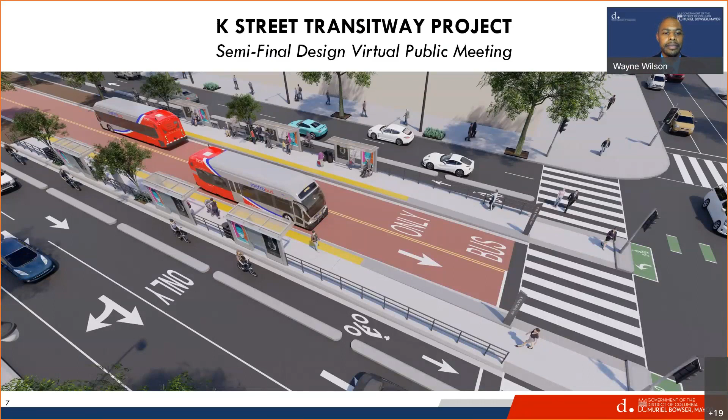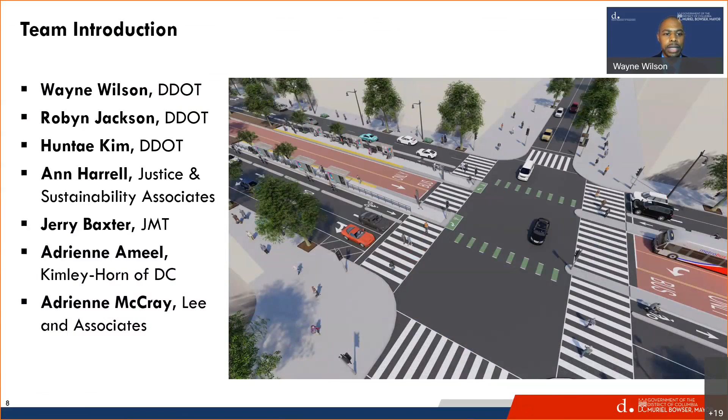This evening, we'll be presenting the 65% design for the project. Ddot and the consultant teams are eager to hear your feedback and the efforts that have been made by the department and the team to progress the project forward. Next slide. With us today, we have Robyn Jackson, the Deputy Program Manager for Wards 1 and 2, Huntae Kim, the Program Manager for Ward 1 and 2, Ann Harrell from Justice & Sustainability Associates, Jerry Baxter from JMT, Adrienne Ameel from Kimley-Horn of DC, and Adrienne McCray from Lee and Associates. Now I hand it over to Jerry.

Thank you, Wayne. Hello, everyone. Thank you for joining us. I'm excited to be working with Ddot on this project and looking forward to talking with you this evening. We will provide a project overview and present details on key project elements. The primary objectives of the project are transit improvements, bicycle facilities, curbside management, which is how the curbside space is utilized, and streetscape enhancements to the corridor. We also provide an overview of next steps and what you can expect to happen relative to the project.

Finally, we'll have a question and answer period where you'll be able to provide comments. Public involvement is a key part of any Ddot project, and I want to emphasize that the project team is eager to hear your input on the project.

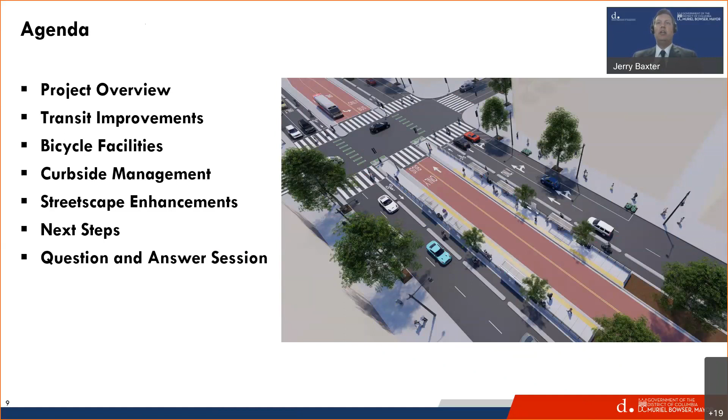Before we get into the what about the project, I'd like to give a little background on the why for the project. This project is in line with MOVE DC, which is the District of Columbia's long-range transportation plan. This plan establishes goals, policies, strategies, and metrics for DDOT to invest in transportation projects and programs that address the needs of Washingtonians.

Across all 8 wards. I've noted on the screen the 7 goals of the MOVE DC program, and the K Street Transitway is a project that addresses every one of these goals. The first goal is safety. Safety is a primary objective in all DDOT's projects, consistent with Mayor Bowser's Vision Zero initiative.

Safety improvements are being incorporated into the project, including median refuges and shorter pedestrian crossings, all-day left turn restrictions and reductions in pedestrian vehicle conflicts, separating bus and vehicular traffic, and providing cycle tracks, which are separated from motor traffic and the sidewalk. Mobility will be enhanced through increased system reliability, improved accessibility, and better transit system performance.

Management and operations is ensuring a good state of repair for the significant investment DDOT is making in the project. We are also designing with maintenance considerations in mind and coordinating with local stakeholders. The project is being designed to be accessible, safe, and welcoming. Our project team is working to create a sense of place to create enjoyable spaces along the corridor.

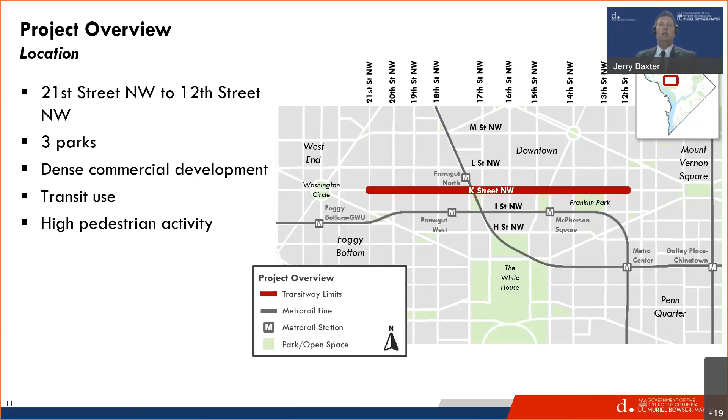The Transitway will span 11 blocks, and while no 2 blocks are the exact same, the typical section shown on the screen provides the general layout that will be carried through the project. The project limits are from building face to building face, but delivery of the transit lanes is the primary goal of the project, so the majority of the work is from curb to curb.

First, the existing service lanes on K Street will be removed. This configuration is outdated and inefficient, which leads to congestion along the corridor. There is a high potential for pedestrian and vehicle conflicts in this configuration, and it will be reduced. The proposed layout was developed considering the district goals, the local area, and the site conditions, including available right-of-way.

As shown on the screen, in the center of the roadway will be 2 separated transit lanes, one going in each direction for buses. Adjacent to these lanes will be medians. The bus stops and platforms will be located in these medians. Next to these medians will be one-way cycle tracks, which will be separated from both transit lanes and the general travel lanes. Between the cycle tracks and the travel lanes will be a narrow median. On the outside will be 2 travel lanes in each direction.

In some blocks, where there is sufficient right-of-way, loading, pickup drop-off, and parking areas will be provided. These locations are between 21st Street and 17th Street and at the eastern end of the corridor. We'll provide a block-by-block breakdown later in the presentation.

The roadway widths do become constrained at the 3 parks along the corridor. At these locations, the sizes of the medians adjacent to the transit lanes will be reduced as shown on the screen. However, the number and types of different travel lanes through the corridor will be maintained.

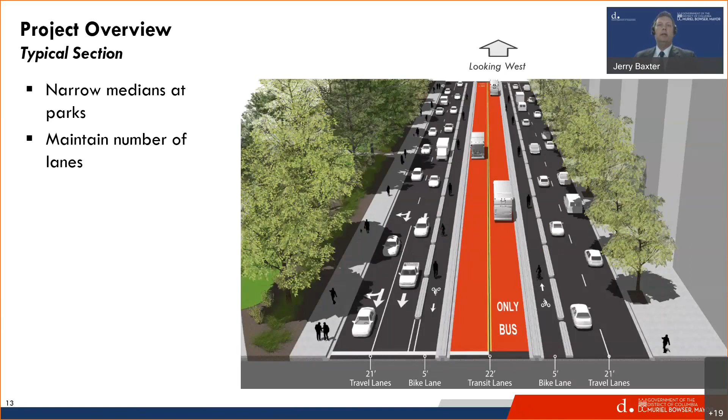This project has been in the works since before 2009. Any project of this magnitude will go through an environmental assessment according to federal standards, which was completed in 2009. Mayor Bowser identified this project as a mayor's initiative in 2018. Since this time, this project has been a major focus for DDOT. Preliminary design was completed 2 years ago, and the team began final design last year.

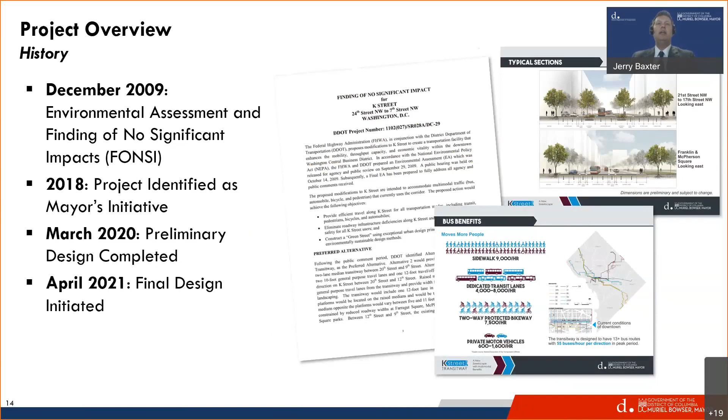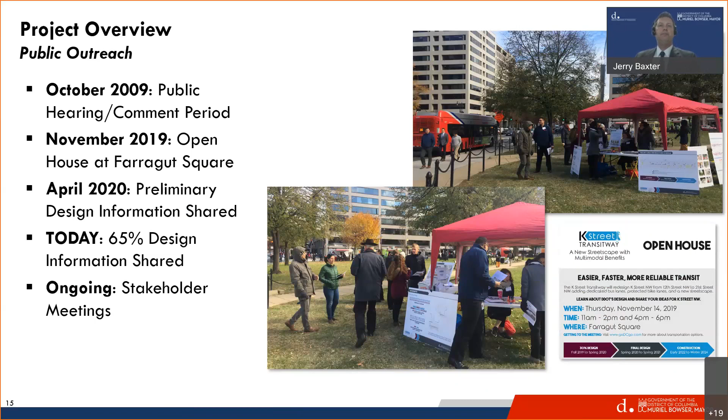As you may know, or would probably guess, there are an abundance of utilities underground in this corridor. Utility coordination is a key project element, and this is an extensive and ongoing effort.

The transitway will include 4 new stops per direction, for a total of 8 platforms. Each platform is paired with one on the other side of the street. The project was developed based on providing connections with the transit network. This is part of an ongoing coordination effort between DDOT and WMATA, and the current plan is to incorporate at least 13 different routes on the transitway. The transitway will serve up to 55 buses per hour per direction during peak periods.

Concurrent with the K Street project, other projects are in various stages for the north-south streets, either in the 2022 budget or proposed in the mayor's 2023 budget. This project is looking at the entire network with their improvements.

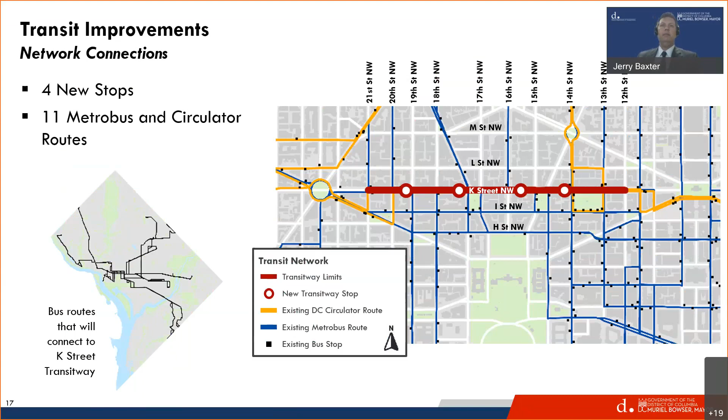The platform design is a major focus of the project, considering accessibility, operations, and a sense of place. Platforms will be 11 feet wide and include amenities such as shelters, leaning rails, trash and recycling receptacles, real-time travel information, and landscaping. The platforms will be designed to be compliant with the Americans with Disabilities Act, or ADA.

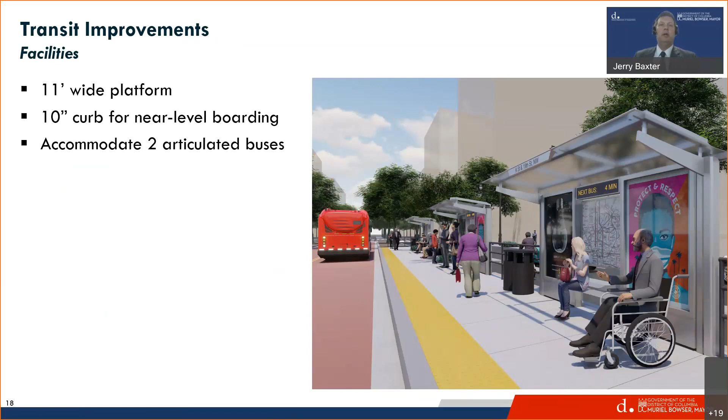The platforms will be elevated 10 inches from the roadway surface, which is higher than the standard curb height of 7 inches. This will allow for near-level boarding. The length of the platform has been designed to accommodate 2 articulated buses at the same time. In addition, landscape and design features are being developed to create a sense of place at the shelter. The goal is to create prominent, welcoming platforms. Access to the platforms will be from the crosswalk, somewhat similar to today, but with some improvements.

The transit lanes will be controlled by bus signals, similar to other locations in the district. The general traffic and bicyclists will follow traditional traffic signals. Based on the proposed typical section and elimination of left turn movements, the corridor will be able to operate very effectively and efficiently. The buses, bicycles, and general vehicles on K Street will be able to go at the same time, with few exceptions. At 19th Street and 13th Street, the buses will have a separate phase to exit the transitway. And at 12th Street, bicycle signals will be provided to separate bicycle phases from the general purpose movement.

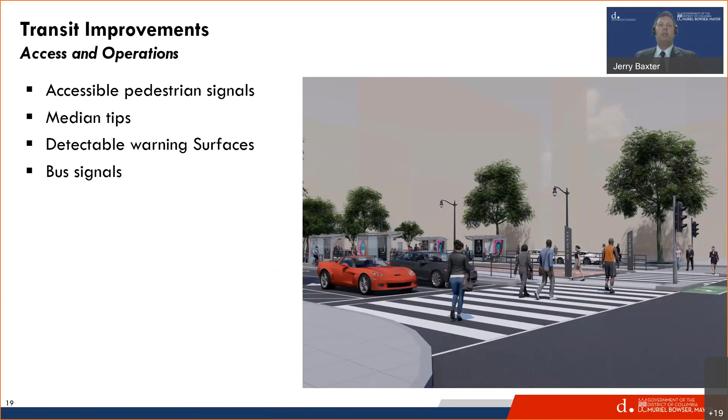In addition to the signal phasing changes, there will be benefits to separating the buses from the travel lanes and general traffic. The issues created by mixing buses and vehicles—parked cars blocking a bus, or a stopped bus blocking a right-turning car, for example—will be eliminated.

The improvements being implemented by this project will reduce travel time for all users while adding access for another mode through the cycle tracks provided along the corridor. I will now hand it over to Adrienne to talk more about bicycles, pedestrians, and other aspects of the project.

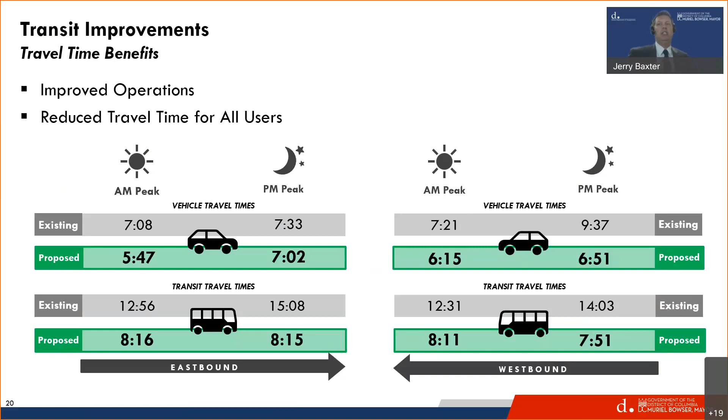Thank you, Jerry. As Jerry just mentioned, although this project is mainly a transit project, it includes safety improvements for both pedestrians and bicyclists. There will be wide, high visibility crosswalks included at all intersections, which will improve safety for pedestrians.

The new bike infrastructure will include two one-way cycle tracks, one on each side of the center-running transitway, protected by a cement barrier approximately 2 feet wide, which is a significant improvement for bicycles along K Street. The cycle track will result in significant safety and access improvements for bike travel across downtown. The only intersection where bikes will have to cross the general purpose vehicle lanes is at 12th Street. In order to ensure bikes can safely cross vehicle lanes, a bike signal will be provided at this location.

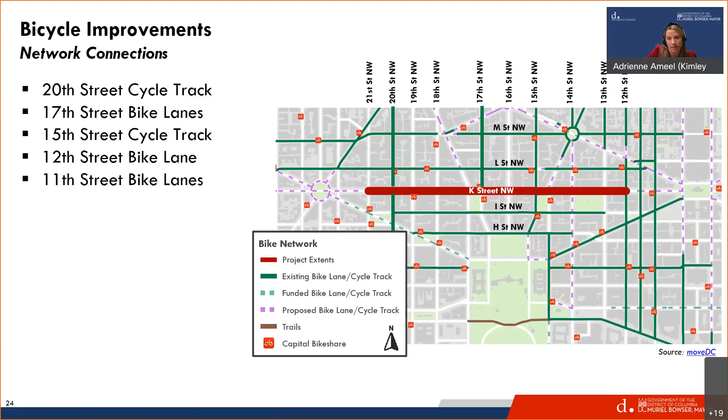The curbside uses currently shown on these graphics are based on multiple meetings and feedback we received from the public, the Golden Triangle Business Improvement District, and the Downtown Business Improvement District. Development along K Street is always changing in this post-COVID environment, so these curbside uses are not final and are subject to change. Please provide feedback during the meeting if you have other comments or recommendations.

Also, as part of a separate project, some minor curbside changes will occur on the side streets, adding pickup and drop off and commercial loading for buildings whose curbside uses were removed along K Street. The trees and landscaping shown on these maps are dependent on utility conflicts that the project team is currently working through, so the trees may decrease in the future due to utility conflicts.

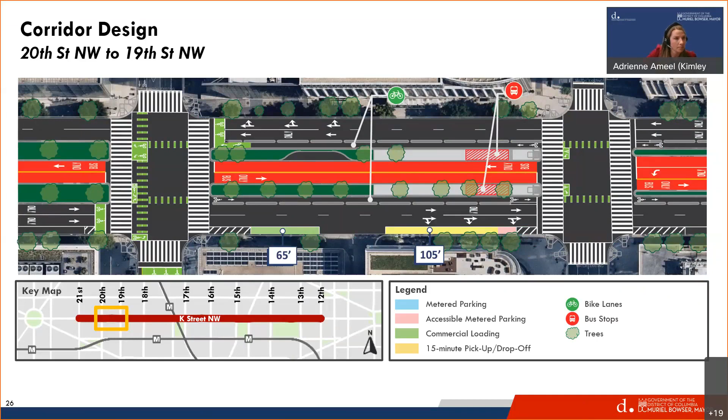Now between 18th Street and Connecticut Avenue, this block has the second set of bus stops, located near Connecticut Avenue. Similar to the first set, pedestrians will access this bus stop using the center running medians. Curbside uses continue on the south side with metered parking, accessible metered parking, pickup and drop off, and commercial loading.

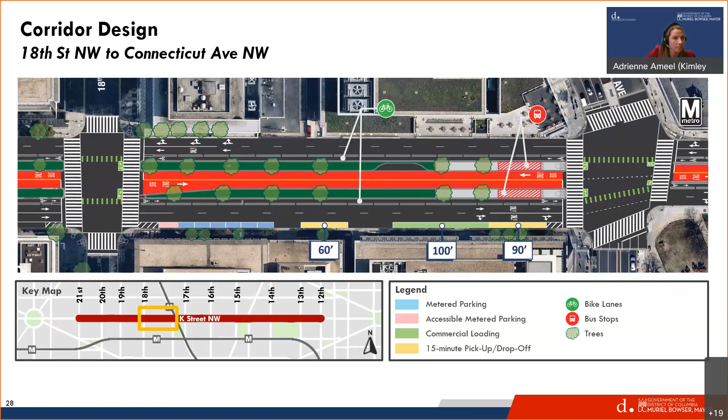15th Street to Vermont, this is a fairly short block. There are no curbside uses on this block due to the constrained right-of-way with McPherson Square to the south. The medians separating the transitway and cycle track are narrow, approximately 2 feet in width.

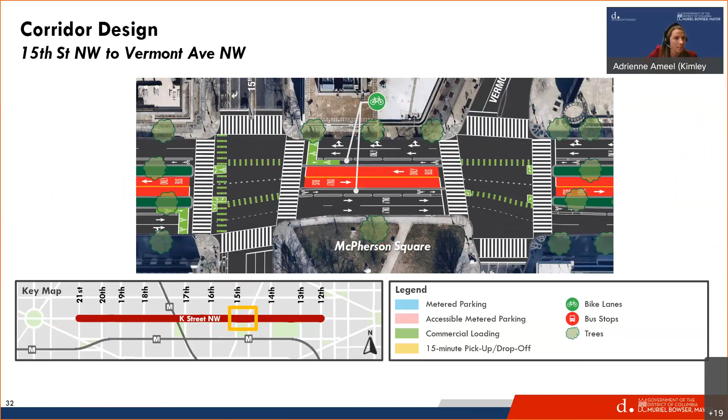Vermont Avenue to 14th Street is the location of the fourth and final set of bus stops. Similar to the other bus stops, pedestrians will access the bus stop with the center running protected medians. There are curbside uses on the south curb at the eastern end, including commercial loading, pickup and drop off, and accessible metered parking.

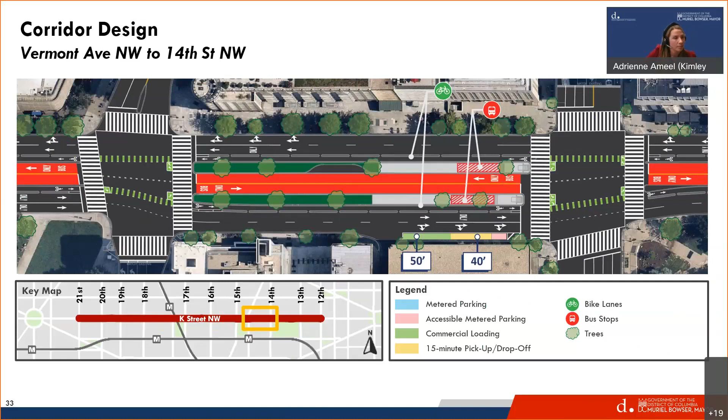14th to 13th Street: there are no curbside uses on this block, with a narrow center median of 2 feet due to Franklin Park on the south side. Something unique on this block is that one of the eastbound general purpose vehicle lanes drops at 13th Street, so only one lane of eastbound traffic will be able to go through the intersection.

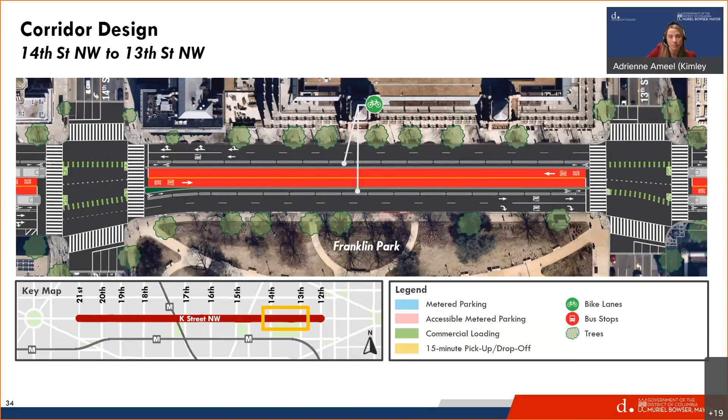From 12th Street to 11th Street, this is a transitional block where buses will transition from the transitway to general purpose lanes in the eastbound direction, and in the westbound direction, buses will transition to the transitway using the center lane. There are no curbside uses on this block and no center medians. The bike lane striping connects to both the northbound and southbound bike lanes located at 11th Street.

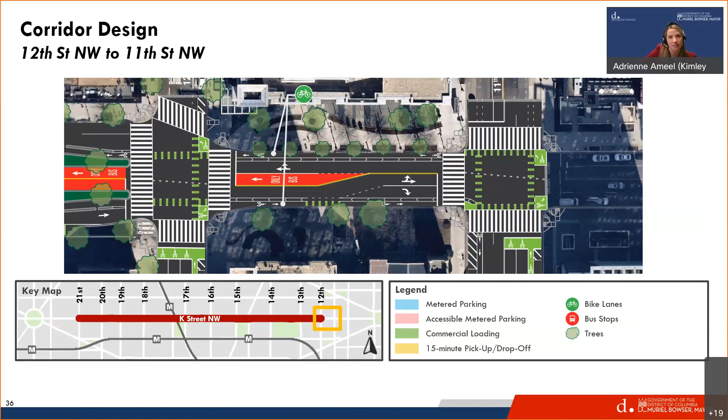In addition to the roadway and median improvements, the project is also going to be doing some sidewalk streetscape upgrades. The goal is to enhance the visual quality and experience for users in the corridor. We're going to do that by looking at material consistency through the hardscape, softscape, as well as the site furnishing.

We also want this to be a green street by enhancing the existing canopy and providing new robust trees. We've been looking at accessibility concerns, and we're going to be improving some of the sidewalk cross slopes as well as the ADA ramps throughout the corridor. We're also supporting opportunities for outdoor amenity, which in turn will activate the public realm.

As we continue, we'll reinforce the sidewalk zone that currently exists by improving consistency. We're starting with the tree pit zone, from the curb to the sidewalk, where we'll preserve existing trees and provide new street trees. We'll be placing new Washington Globe Twin 20 light fixtures in the corridor, and providing other furnishing as well. We're showing some DDOT standard furnishing, but we're working with BIDs to integrate their furnishing standards in key areas, and also identifying opportunities for public art to be incorporated.

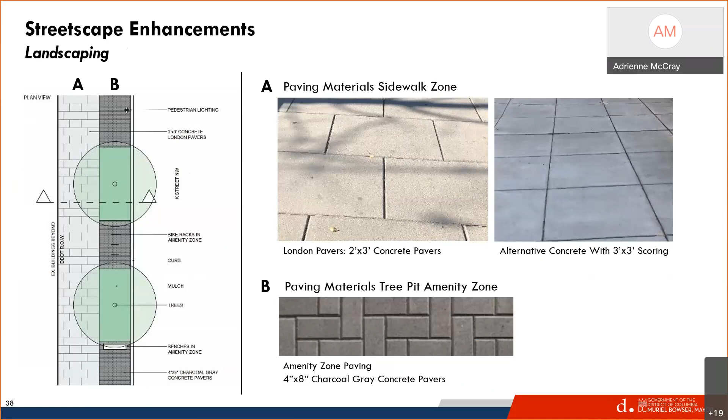The existing street trees along the sidewalk are part of the amenity of the street and will be maintained as much as possible. We've been evaluating the condition of the trees to determine if enhancements are needed to improve health, and any new trees planted along the sidewalks will match the character of the existing trees. This will help reinforce our goal to provide a continuous canopy that offers changing visual interest through different times of the year.

The existing medians throughout the corridor are going to be removed, so we'll be planting new trees in the medians. We'll plant as much as possible, noting we've got a lot of utilities we have to work around.

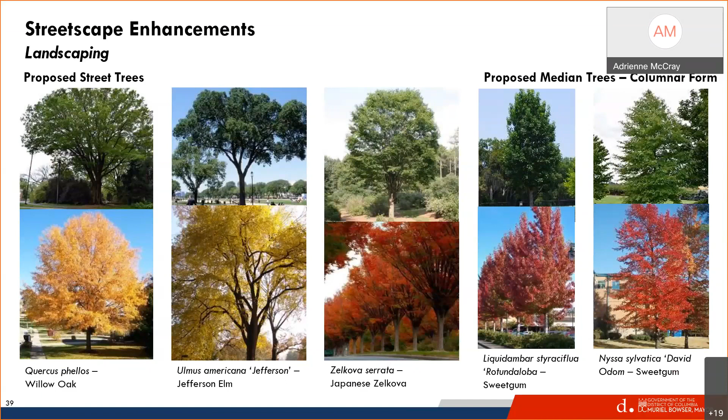In addition to the trees, the medians will be planted with hardy shrubs and ground covers. We've got two planting strategies for the medians: one is at-grade planting, standard, where the soil level is at the height of the curb. The second strategy is low-impact development using a bioretention planter, where the soil level is slightly recessed, allowing runoff from the roadways to be captured and filtered through the soil medium. This will help our project meet the citywide green infrastructure and stormwater management goals.

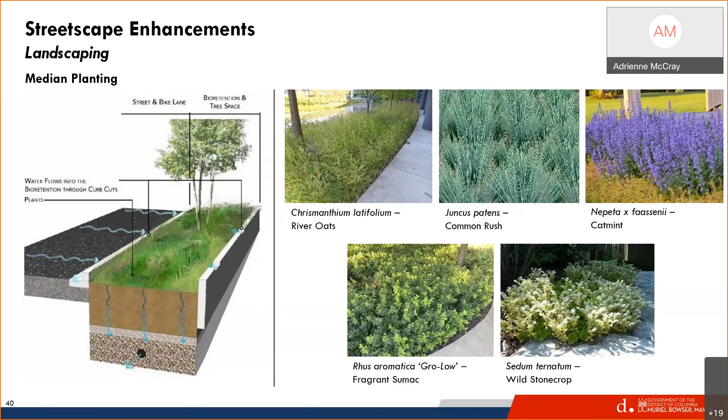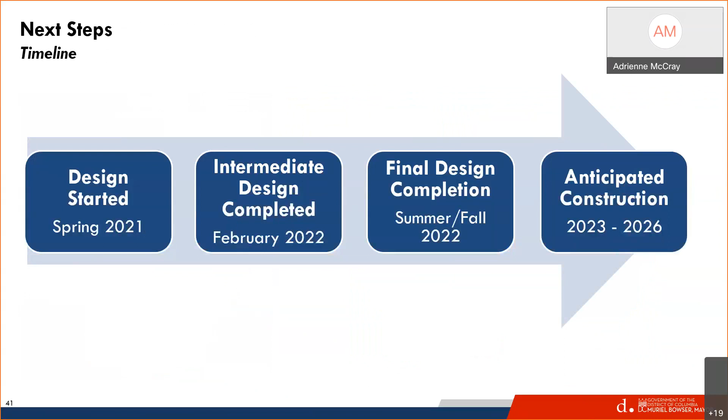Thank you, Adrienne. So the image on the screen provides the next steps and project timeline for the project. We started our design last year, and our project completed the intermediate design in February. We are now progressing towards final design, which is scheduled to be completed late this summer or early this fall. From that, a construction contract will be advertised, with construction estimated from 2023 to 2026. The estimated construction duration is 30 to 36 months, and the final design phase will include development of many of the details related to the construction of the project.

It is also important to note an additional public meeting will be held concurrent with the final design. I will now hand it back to Ann, who will walk us through the Q&A portion.

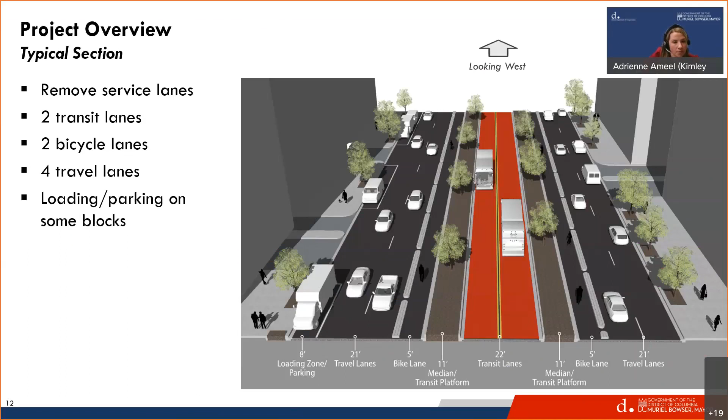Okay, the next comment and question.

The only concern I have is that personally, I'd be pretty nervous to use those bike lanes since they're placed right in the middle of traffic. The similar ones on Pennsylvania Avenue are really uncomfortable, and turn boxes just feel extremely dangerous instead of turning with traffic like you would in a roundabout or traffic light. Has a consideration been made to move the cycle tracks behind the trees along the sidewalk? And thank you.

I believe we may have already answered this question of why it's in the center, but I don't know, Wayne, if you want to add any more to that response.

Yes, so internally at DDOT we had this debate as well, because we do understand the natural tendency is to be curb-running for our bicyclists. So we evaluated, just because of the high turn volumes from garages and vehicles, and the ability of having an 11-foot median between the bus and an additional buffer between the cars, we selected the center.

It is something that was a long debate, and we did a stakeholder meeting, we did public meetings about it, and we did reach out to WABA because we had the same concerns about center running versus curb running. And as I stated earlier, it was because of the high turn volumes as well as the changing right of way, where the bike will actually have to do some certain amount of maneuvers and shifts and push it closer to traffic. We just felt that the center running was the best option, the safest option, even though it's not prevalent in the city. It is something different. So we do understand the concern, but that's the reason why we went with center running.

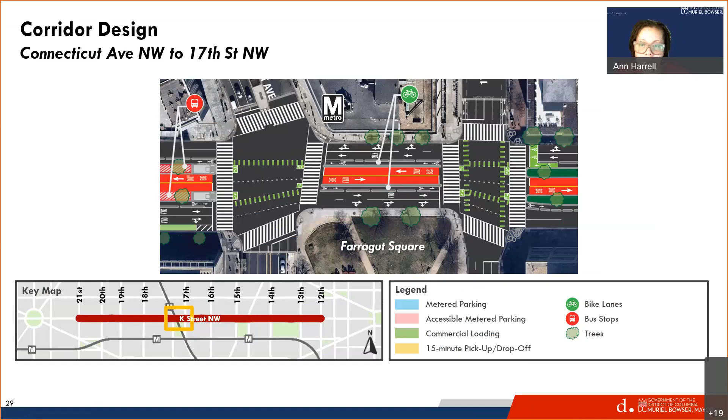The remaining questions ask how one positions themselves. I think you might have answered this. It's difficult to understand how to turn right when using the inside bike lane. Hopefully what Adrienne just described has answered your question, this is for Bill Gallagher. If not, we'll come back to your question. Can we show the two-stage diagram really quick, that may answer it?

Yeah, we can go back to this and I'll point this out again. As you can see, this is the two-stage turn box, which is a little bit confusing. The westbound cyclists would go westbound and pause at that two-stage turn box until the light turns green in the southbound direction. You have to pause and wait for that light to turn green, at the same time vehicles would be able to go southbound here on 17th Street.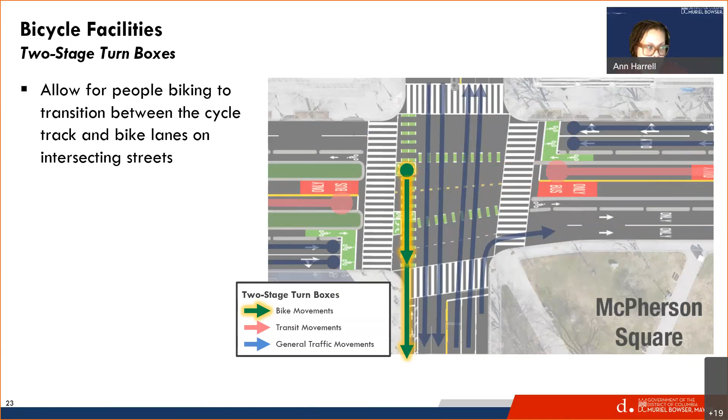So hopefully that clarifies. Mr. Gallagher, if you have a follow-up question, please post it in the Q&A and we'll respond. We're going to pivot for a moment and talk about bioretention environmental.

Perhaps Adrian McCray would be the person. The first question is, will there be any rainwater bioswales included in the design? You're on mute. Sorry about that. We are including some in some of the median areas.

Another question is about the visual impact of plants and trees being studied to make sure they are not blocking all modes' views when turning. Yeah, so the tree placement as we're coming to the intersections will be 40 feet away from those intersections to allow for views of the traffic coming into that intersection. As far as ground cover, as we're getting into the intersection, we're planning to keep our plant material at a 2 foot maximum in those areas.

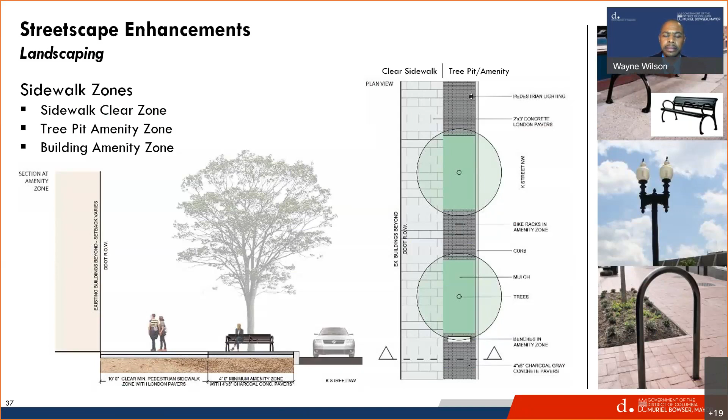Wayne, thank you. We're going to pivot momentarily back to the subject of bicycles and related concerns. I find turn boxes both confusing and scary on multi-lane streets. I'm sorry, this is just a comment, not a question, but I echo the comments of others that they need protection. A question: what will be the buffer spacing between the personal car lanes and the bike lanes? What will be the physical separation elements of the buffer?

So we're hearing the continued concerns regarding the buffer. Yeah, we'll definitely take a look at it. Right now it's about a 2-foot cement buffer. We can add bollards, I see that as a comment. I'm not sure if this is the same comment on the design, but that's some great feedback.

Another question, possibly for you Adrian, is how many bikers can fit in a turn box at a time? So the 2-stage turn boxes vary by intersection, depending on how much space we had. So it just varies from 1 to 2. It's not many bikers that can fit in those turn boxes.

Another bicycling question is, will there be any bollards to protect cyclists in the cycle track from drivers? Additionally, this could help prevent drivers from impeding the bike lane when making U-turns, dropping people off, etc., like can happen on 15th Street. Yes, we can definitely look into that. Right now we're not showing the bollards, as you can see from the rendering on the screen, but that's something we can add and we'll take into account.

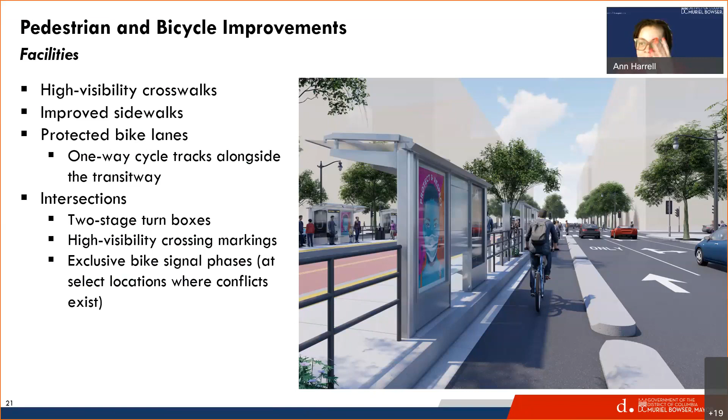Thank you so much. First of all, I want to thank all the project team members for your great work here. I know this is a difficult task, and you seem to have done a very good job getting us to where we are today. I hope we're able to move up the construction timeline from where it is now.

The only question I have is if folks could talk a bit more about the terminus at 21st Street. I live in Foggy Bottom, and from what I understand, in its interaction with 22nd Street onto the ramp, either up to Washington Circle or down to the underpass under Washington Circle, it'd be helpful to understand a bit more of how that interaction is going to work, given that the project doesn't necessarily extend all the way to Washington Circle. Thank you.

I guess, Nick, can you maybe share slide 25? Perfect. And I guess, maybe I'm not capturing the question, so the idea is, as you can see, the transit lanes will end. The buses will either turn, they will have their own separate signal phase to go, so if they're coming out and turning left, or straight forward and right, and then for general traffic, it will essentially return to its existing condition to the west of the intersection. Not sure if that answers it, or if there was something else.

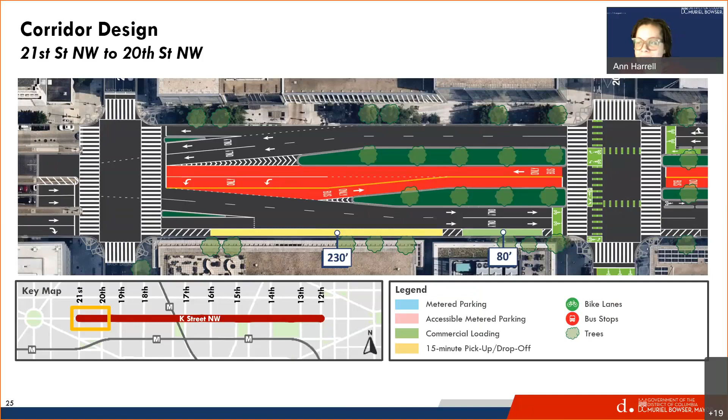If there's no follow-up, I'd like to have Garrett Hennigan unmuted to ask his question or make a comment. Good evening, thanks so much for the opportunity and for the presentation. Garrett Hennigan, I'm with the Washington Area Bicyclist Association, and glad to see all this coming together. Three quick comments that I wanted to make.

As others have mentioned, but I want to emphasize it, 5 to 6 foot bike lanes are frankly too narrow for this. A 7-foot bike lane would allow people to pass each other if they're traveling at different speeds, and allow people to bike next to each other, which would be critical. I understand the street narrows quite a bit in some places, but having a 5-foot bike lane next to an 11-foot planted median is the wrong way to go.

We should have a wider bike lane and a narrower planted median. Second, I want to talk about intersections. As others have noticed, taking the left turn or the right turn into or out of these lanes is going to put you in the middle of a street, in the middle of a painted box, with no protection while traffic whizzes by, and all you get to do is wait for the light to change. This should not be an unprotected space. This should be behind a curb. I know you'll say there's no room for it, but there is. That would not limit left turns because they're not allowed. That would not limit cross traffic because these intersections are so wide. Let's find a way of putting those people waiting to make a turn in a protected, hardened space.

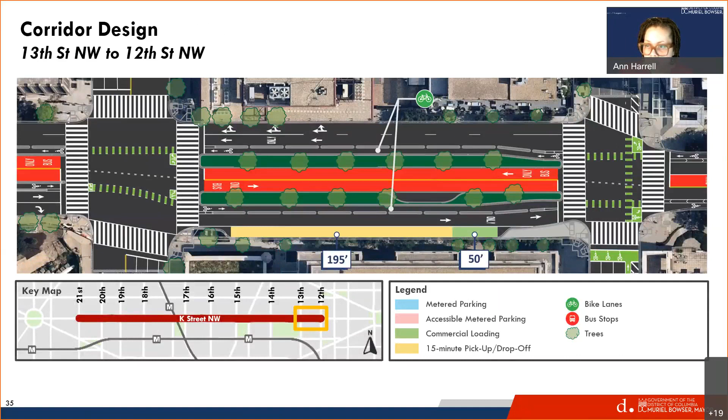I just want to echo what the previous commenter said. I don't know if anyone at DDOT works with Andrew DeFrank, but I saw a video he posted on Twitter, I think yesterday or a couple days ago, about people using the 15th Street bike lane. It's been swarmed with people this past weekend at Cherry Blossoms. So I am worried about the turn box only fitting one or two cyclists. I think the capacity would make it very uncomfortable to have a mass of cyclists just sitting in the road there, and clearly they're popular.

And I want to thank you all so much for your work on this. It's been great.

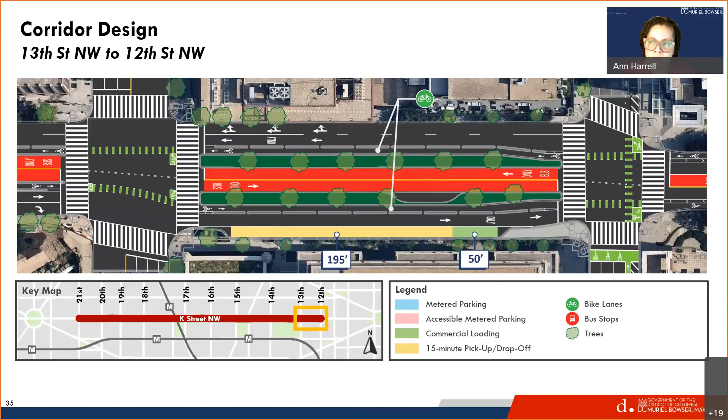Yes, I'd like to, first, thank the whole project team for putting this together, and I'd echo, honestly, what the rest of the speakers had raised before in terms of issues and comments. I understand there are a lot of competing uses in this corridor, but I'm really concerned that we're still prioritizing the speedy travel of cars through this rather than the safety of non-car options.

People mention bikes, but I think a big emphasis I'd bring is pedestrians. Taking away several feet of space for a sidewalk, and then that's even closer to speeding cars. I think it really affects the pedestrian experience and it makes it very difficult.

This is an incredibly accessible area for public transit. I mean, there are 11 bus routes, 3 metro stations, and it seems like the perfect place in the entire District of Columbia to say you don't really need a car to access this area.

So I don't know if anyone has suggested this before, but I would really suggest maybe taking away a lane of single occupancy vehicle traffic on maybe one side or both sides. I know we're pretty far into the design, but I think that's a reasonable thing to suggest to allow for maintenance of sidewalk space and bicycle space as well. I think that would really be, maybe that's a bigger picture suggestion.

Maybe I'm thinking too big, but education and enforcement don't really work, and a car will still rev and go 60 on K Street, whether there are 6 lanes or 2 lanes, but if you make it 1 lane, it'll make a really big difference. And that's my point. Thank you.